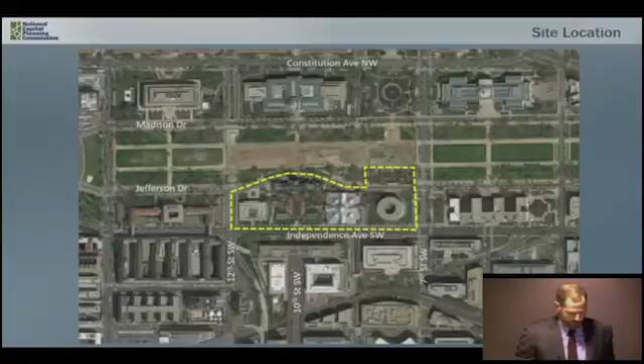So as a reminder, the project area is located on the south side of the National Mall between 7th Street and 12th Street, as well as Independence Avenue to the south and Jefferson Drive to the north. The site is a combination of important historic and cultural facilities which form the centerpiece of the Smithsonian Institution on approximately 17 acres. The campus also falls within the National Mall Historic District.

Today, the National Mall side of the campus is the source of the majority of visitors. As a result, the master plan recognizes the need to improve access and wayfinding from the north. However, the campus is also the terminus of 10th Street Southwest, which provides an important visual and physical connection from the southwest waterfront to the National Mall.

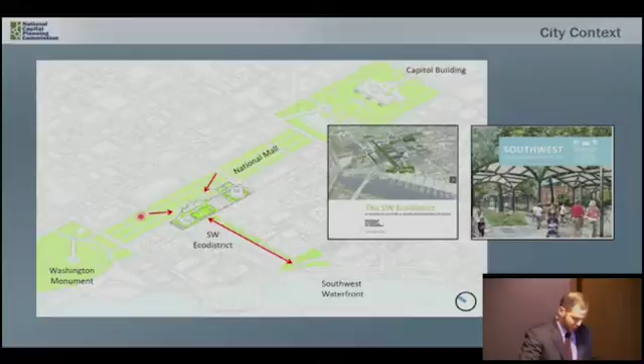The southwest quadrant has been undergoing significant growth, along with a number of planning efforts currently underway led by the District Office of Planning. In fact, the population and number of households are projected to double between now and 2045, and jobs are expected to increase from 80,000 today to nearly 110,000. 30 new developments are also underway, including entertainment, residences, and retail.

As such, the campus is located at a critical point where the east-west axis of the National Mall and this north-south corridor leading to the waterfront meet. Through the master planning process, it has the opportunity to better engage the neighborhoods to the south, attracting visitors, residents, and employees. I'll go into more detail about this context later in the presentation.

So here's the existing site plan with Independence Avenue to the south and Jefferson Drive and the National Mall to the north. Most of you have been to the campus, but just as a recap, I will walk quickly through the existing site and the various buildings and gardens to provide some context.

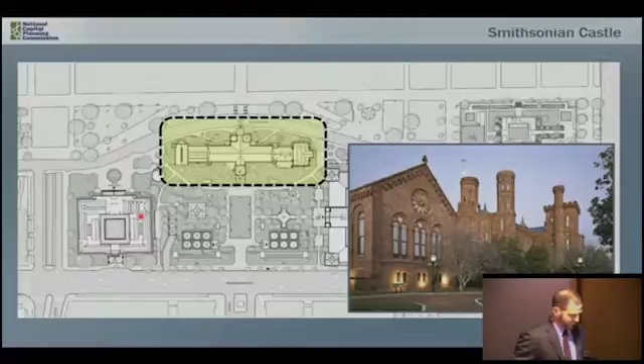First is the Smithsonian Castle, which is the centerpiece of the campus and also an icon on the National Mall. On the west side of the campus, we have the Freer Gallery, which houses one of the premier collections of Asian art.

Towards the center of the campus is the Arts and Industries Building, which was the first United States National Museum. On the east side of the campus is the Hirshhorn Museum and Sculpture Garden.

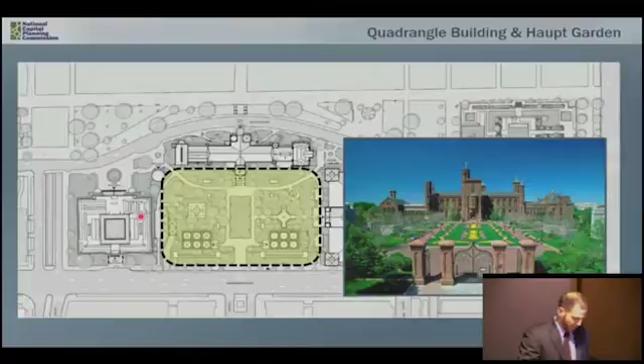At the center of the campus is the Quadrangle and Haupt Garden, which opened in 1987. This is a 3-story underground complex of museum, auditorium, and office space. The Haupt Garden occupies the roof, which is approximately 4 acres in size.

The Sackler Gallery and the National Museum of African Art are entered through 2 pavilions located on top of the quadrangle. These have stairs and elevators that lead down to the museum and other spaces.

Finally, we have several other structures and gardens, including the Ripley Center Pavilion and the Kathrine Dulin Folger Rose Garden, as well as the Ripley Garden, which is located between the Hirshhorn and the Arts and Industries Building.

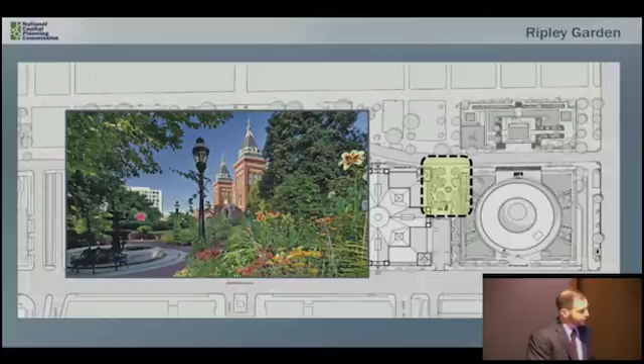In terms of process, a draft Environmental Impact Statement, or EIS, has been prepared to evaluate the potential impacts resulting from implementing the master plan. The draft is currently available for public comment, and here NCPC is the lead federal agency for NEPA compliance.

In this case, the Smithsonian works with NCPC where individual projects under the master plan will be submitted to the Commission for approval. In addition, the Smithsonian has also initiated the Section 106 process and has held several consulting parties meetings to discuss the number of historic resources within the campus.

The master plan, as I mentioned, is intended to guide development of the campus for the next 20 to 30 years. As with other master plans reviewed by the Commission, the plan will identify projects to be implemented over time as funding becomes available. Individual projects, again, will require review by you as the Commission.

While the master plan will include conceptual renderings and graphics of proposed improvements, the specific designs will be developed at the individual project stage. As such, the phasing of these projects may impact implementation. Therefore, staff recommends the Commission request the Smithsonian prepare a phasing plan which would be included in the draft master plan submission.

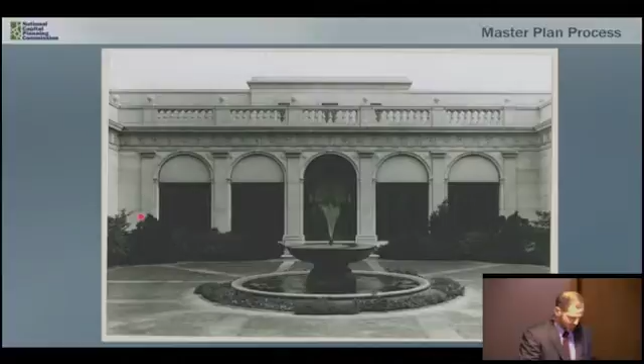To address individual project implementation over time, as well as potential impacts to historic resources, the Smithsonian stakeholders and consulting parties will be developing a programmatic agreement, or a PA, to comply with Section 106 of the National Historic Preservation Act. PAs are utilized when the potential effects of undertakings are not yet known, and it will set forth a process for further avoiding, minimizing, or mitigating effects through project design and implementation. As such, the PA will be a critical roadmap for future actions.

These goals are generally consistent with many of the policies identified in the comprehensive plan, and as such, staff recommends the Commission support the goals of the master plan, which address the Smithsonian's need to meet its long-term space requirements and address physical and operational deficiencies that impact visitor use and experience.

So quickly, I'm going to highlight some of these goals, which include restoring museums such as the Castle and the Hirshhorn, improving connectivity for visitors both from the National Mall as well as neighborhoods to the south, recognizing the existing flow of visitors from the National Mall, but also the growth and change occurring to the south, and the potential for an improved entrance from the south.

Improving visibility for the various museums and services housed in the campus, in particular the Sackler Gallery and the National Museum of African Art, are among the least known due to their below-grade location and limited visibility. Greater visibility of the castle from the south is also an opportunity to emphasize this approach as a new gateway.

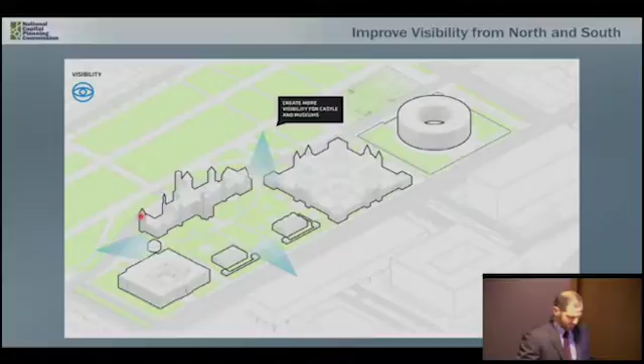The master plan also looks at consolidating loading areas and maintaining a high-quality landscape.

So what I'm going to do is give you a high-level overview of the alternatives, first by describing Alternative D and ending with Alternative F. Then I'll provide an overview of the elements common to all alternatives, and then highlight some of the more significant differences.

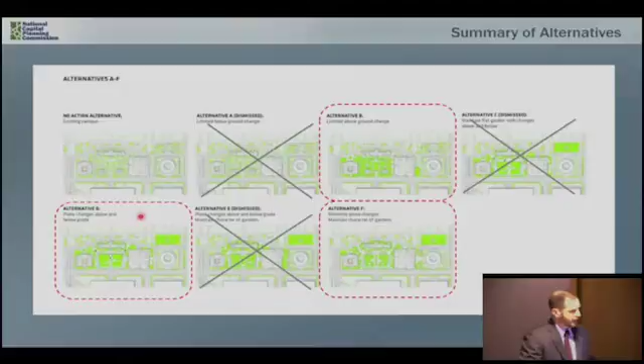So again, at a high level, Alternative D reflects the Smithsonian's first concept of the master plan. It included some of the most dramatic changes to the campus, including a new park-like setting, a large dip in front of the castle, and a significant amount of excavation.

Alternative B was explored as a way to minimize changes. The basic setting of the campus would not be significantly altered. Potential improvements to the campus functions and service would also be minimal.

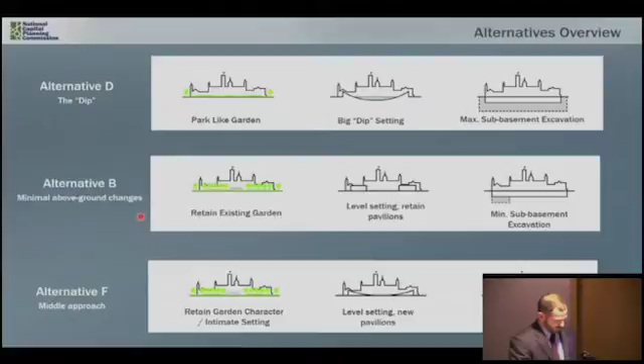Alternative F was last developed in response to comments received, and also as a result of Smithsonian's own evaluation of the master plan.

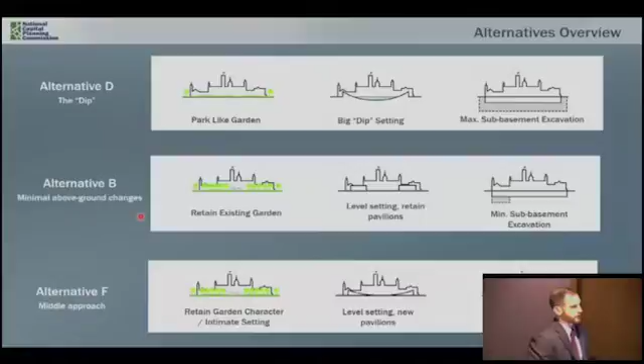So looking at Alternative D, again, it includes the most significant changes to the campus, including a large dip which goes below grade approaching from the south, the moving of the existing quadrangle pavilions and construction of new pavilions, and also significant changes to the Hirshhorn, including removing some of the site walls and changes to the sculpture garden. Here's one of the early renderings of the alternative looking from the southeast.

Again, this is perhaps the most radical departure from the existing conditions.

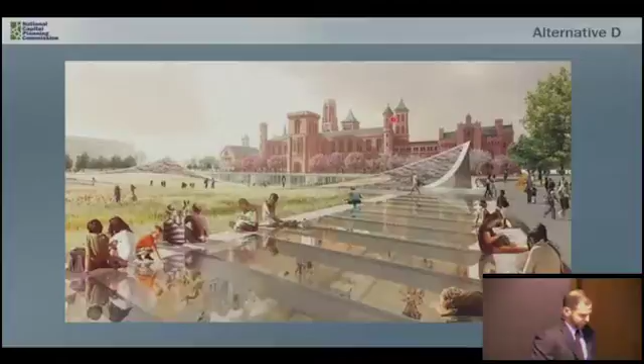Alternative B was explored as a more minimal approach. This alternative includes more limited changes above grade. For example, the pavilions would remain in place, and the flat setting of the castle would as well. Under this alternative, changes above ground would be minimal, but so would campus improvements, particularly to some of the below-grade museums and other spaces. Also, views to the campus and visibility to the museums would not be greatly improved.

After reviewing these earlier alternatives, as well as input from stakeholders, the Smithsonian created Alternative F as another approach, minimizing some of the changes which had raised concern, but still trying to maximize improvements to the campus function and service.

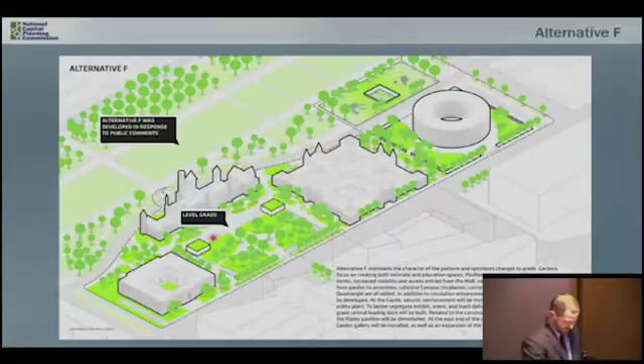So in this alternative, the flat approach to the castle is retained along with the parterre on the south side of the castle, while the pavilions are moved and the character of the garden is intended to be retained. Changes to the site walls of the Hirshhorn are also more limited. And here's an early conceptual view of this alternative.

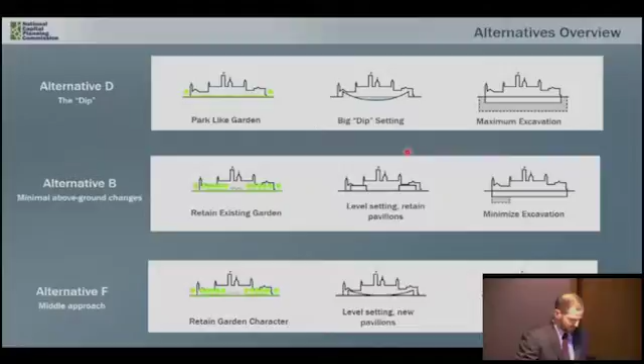Throughout the process, Alternative D in particular generated a significant number of comments and concerns, and while Alternative B was helpful in exploring how to minimize changes, it did not appear to best address some of the master plan goals, such as improving visibility and functionality for museums and services.

As such, Smithsonian developed Alternative F to address these major comments by retaining character of the gardens, as well as the flat setting and approach of the castle.

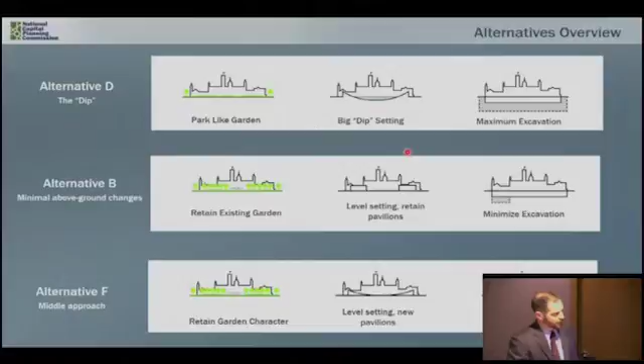Staff further recommends the Commission find that Alternative B and F also minimize the amount of sub-basement excavation, which was another public comment, by accommodating the program elsewhere in the campus. As a result of these changes, Smithsonian feels that Alternative F best meets their needs while addressing comments raised through the process.

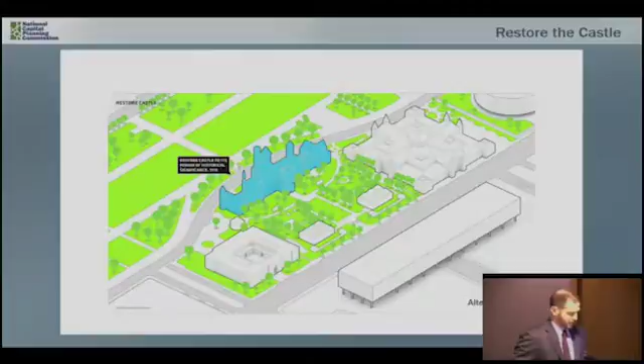With that high-level overview, I'm going to describe some of the major project components that are generally consistent across all the alternatives. They include, first, the castle being restored to its period of significance.

Over time, many of the large spaces within the castle were infilled with new floors and rooms. The Smithsonian proposes to remove many of the non-historic partitions to return the castle spaces to their original configuration where possible. Much of the existing office space, restrooms, and gift shops would need to be relocated as you're opening up much of the space to allow the Great Hall to be restored. The upper Great Hall, which has also been subdivided, would also be restored.

In addition, the Smithsonian has studied the castle to identify potential seismic risks and has determined that seismic protection would be appropriate to help protect the structure and the symbolic center of the institution. As a result, the master plan calls for providing seismic protection to the castle. The specific measures and implementation strategies would be developed at the project level, which would also require additional studies and engineering. The outcome of these additional studies would not affect the level of detail provided at the master plan.

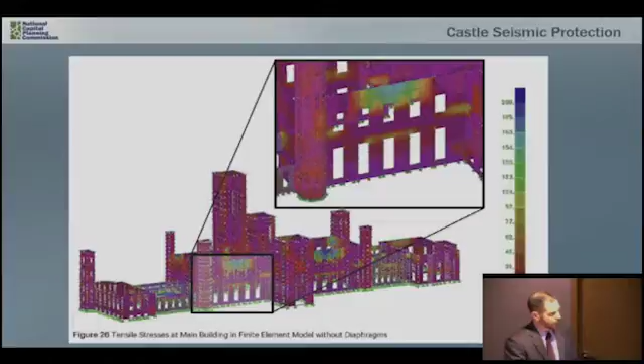The master plan also proposes a new below-grade visitor center. This would be generally located between the castle basement and the quadrangle building, which is again below grade here. It will connect to the restored castle, which will be accessible to the public. The visitor center would help accommodate some of the services that must be relocated due to the restoration of the castle, including the restrooms, cafe, and gift shop. Access to the visitor center would be provided through stairs, ramps, or pavilions, and additional daylighting could be provided to the underground spaces.

The Smithsonian believes that locating the center adjacent to the castle is important because its iconic image is well known to visitors who would seek services in that location. Further, the proposed location between the castle and the quadrangle would allow for below-grade connectivity between the various museums and services.

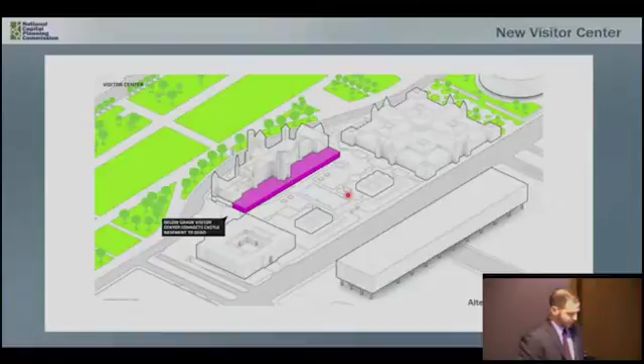Currently, the campus is served by several loading areas. Each of these is accessed from Independence Avenue Southwest. The quadrangle loading area here is located below grade, just east of the Freer Gallery. There's an entrance ramp that accesses it there. Another loading area is located in a surface parking lot next to the Arts and Industries building. And then finally, the Hirshhorn Museum has a ramp near 7th Street.

The Smithsonian seeks to consolidate loading where possible to meet their current facility needs, future facility needs, and to eliminate ramps in these parking areas that break up the campus visually. These areas could also become additional garden spaces in the future.

A new underground loading area would be accessed from the ramp west of the Freer Gallery. This loading area would be located at a sub-basement level, partially located beneath the west end of the castle. The Smithsonian has noted that the connection to the Hirshhorn Museum to this new loading facility would be challenging due to the 9th Street Tunnel, which is located here.

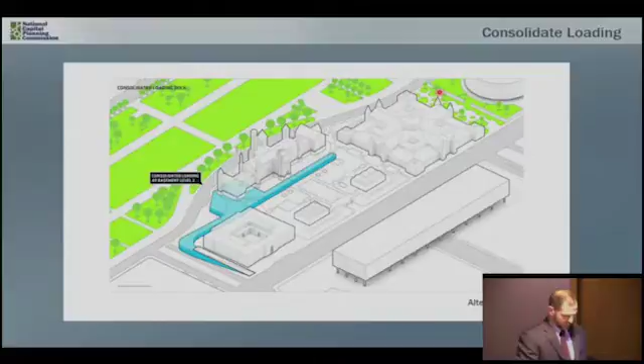A permit from the district's Public Space Committee would be necessary to accommodate the new curb cut, and the Smithsonian has applied for that permit, with discussion occurring in early 2018. Additional coordination would be necessary with the District Department of Transportation to address traffic and intersection impacts related to any new loading configurations. Loading generally occurs after hours and is planned in advance.

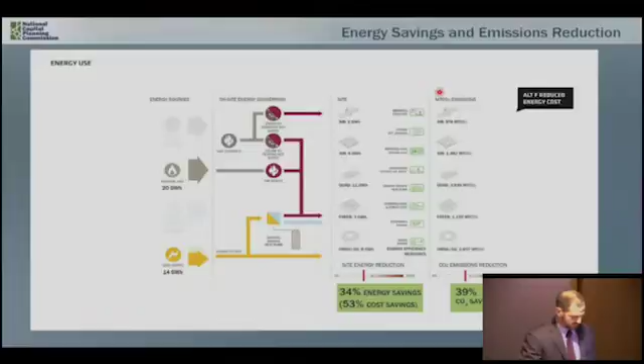The master plan also proposes the creation of a new underground central utility plant to serve the campus. This new facility will be modern and more energy efficient, allowing the Smithsonian to better control climate systems and services for visitors, staff, and critical museum collections. Underground utilities across the campus would also be upgraded.

Here you can see some analysis performed by the Smithsonian, which expects substantial energy and cost savings in addition to improved ability to control campus systems. The Smithsonian has also indicated that one of the goals of the master plan is to increase east-west connectivity across the campus and to help increase general accessibility for those of all mobility levels.

For example, currently the Freer Gallery is the only museum that does not have an entrance facing the Haupt Garden and the quadrangle. In addition, the wheelchair accessible entrance of the Freer is located off Independence Avenue, and those who use this entrance must ring a bell to gain entry.

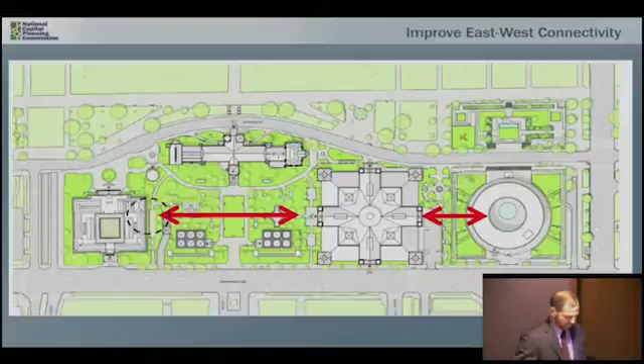The master plan proposes to add another accessible entrance on the east facade facing the Haupt Garden. With the removal of the quadrangle loading area, this new entrance would allow direct access between the Freer Gallery and the garden. In addition, it will allow for the establishment of that west to east connection.

On the northwest side of the campus, the Ripley Center is entered from a pavilion located between the Castle and the Freer Gallery. The master plan proposes to remove the pavilion to permit improved views and pedestrian access from Jefferson Drive and the National Mall into the center of the campus.

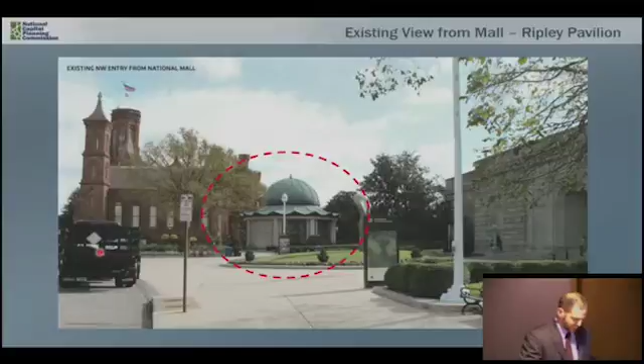This view will help assist visitors in recognizing the presence of the other museums and gardens located south of the castle. Access to the center's facilities would be provided through the quadrangle and the visitor center.

The Smithsonian has indicated that the Arts and Industries building will continue as a flexible space for temporary exhibitions and public events. At this time, the building has been identified as a potential location for other museum uses, but no final determination has been made.

Because the building and its historic character make it a prime candidate for museum use over the next 20 to 30 years, staff suggests the Commission request the master plan indicate the conversion of the Arts and Industries building into a museum use is reasonably foreseeable as a long-term project, regardless of the final occupant. And then further, the master plan should describe any implications for such a use.

The master plan also calls for the restoration of the Hirshhorn building, and the exact details again would be identified as the project is developed. I'll describe potential changes to the sculpture garden a little bit later in the presentation.

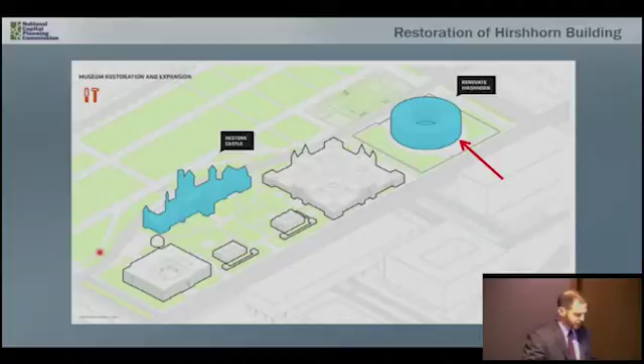And then finally, the master plan also calls for updates and improvements to the perimeter security. Again, details will be developed with the design of the project, and Jefferson Drive will remain in its current configuration.

In general, staff finds that these projects will support the Smithsonian Institution's long-term needs. They will also help enhance the visitor experience and help modernize the campus. As such, staff recommends the Commission support these components as they help improve visitor service, increase access across the campus, and modernize facilities, while recognizing that program and functionality must be balanced with historic preservation, planning, and urban design goals.

And as I noted, the specific designs for each project will be developed as funding becomes available, and these details will be critically important in successfully implementing each project while minimizing any negative impacts.

So while the alternatives share a number of similar elements, there are several more significant differences that primarily deal with the amount of above-ground changes. First, I'm going to discuss the quadrangle building and pavilions.

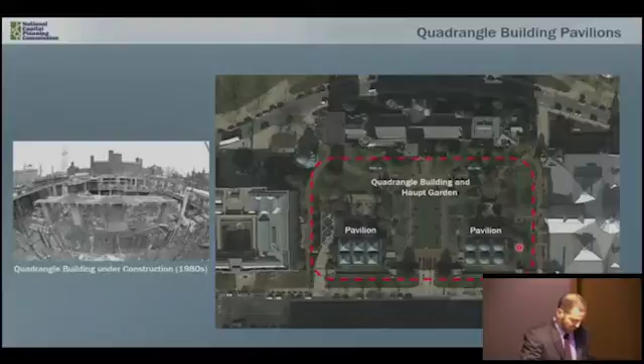Today, the Sackler Gallery and the National African Art Museum are accessed through these 2 pavilions, which are an above-grade extension of the quadrangle building. They include stairs and elevators leading down to the museum spaces below grade. The Haupt Garden forms the roof of the building.

And while the quadrangle and pavilions are contributing to the National Mall Historic District, the quadrangle building itself was found not eligible for listing in the National Register.

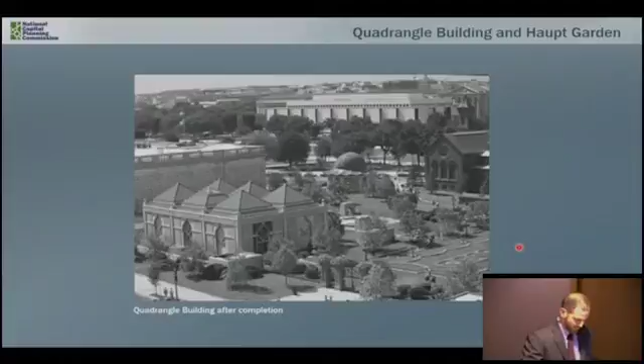The Smithsonian seeks to make the Castle, Sackler, and National African Art entrances more visible to the public, particularly from the National Mall, as well as to increase functionality of below grade museum spaces and to improve visibility from the south. Visitor studies show that these below grade museums are known less than their larger counterparts on the mall, and the context of the pavilions has changed over time, even from when they were first completed.

And further, the context continues to change. The Southwest Eco District Plan, along with the Maryland Avenue Small Area Plan, considered how the area south of the Mall campus could be redeveloped, with the existing federal facilities redeveloped as a sustainable mixed-use community.

The Commission also recently approved upgrades to Banneker Park to help facilitate the pedestrian and bicycle connection, which leads down 10th Street to the waterfront. At the same time, there are a number of other projects, such as the International Spy Museum, as well as the wharf development, which are either under construction or nearing completion.

Other cultural uses, like the new Anthem Theater and Arena Stage, have a natural nexus with the cultural uses of the Smithsonian. As such, staff recommends the Commission find that the master plan must consider the context of a changing city, particularly the Southwest Eco District and waterfront, which will change the character of Independence Avenue and the southern approach to the campus. This changing context suggests the campus can be an important connection between the Mall and the city in a way that is currently not.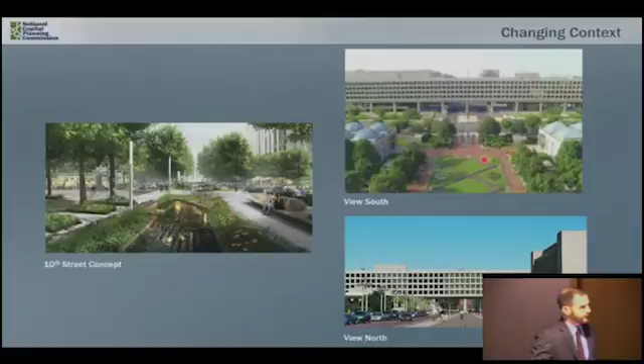In addition, the Forrestal building may one day be reconfigured to allow open views to the north and south. These new views, as well as wider views of the castle, could enhance the connection. Also, placing the visitor center on the south will strengthen this relationship. And finally, I'll note that the new District of Columbia zoning regulations would allow future private development on these sites to be taller and closer to Independence Avenue, further changing the context.

So with that, I'd like to talk a little bit about the functionality of the quadrangle. These changes have implications for both views and connectivity, but importantly, they also impact the functionality of the below-grade quadrangle spaces. On the left, you can see Alternative B, which keeps the pavilions, highlighted here, in their current location.

The Smithsonian believes that retaining this location would not greatly improve the function of the quadrangle interior, as the public spaces and circulation cores could not be connected to the visitor center or the castle. This lack of connectivity does not allow for an efficient floor plan and requires the public to pass through back-of-house functions, which are located here.

By contrast, in Alternative D and F, new pavilions are built closer to the castle and smaller in size, and shift the vertical circulation core to the north, connecting them with the public spaces of the visitor center, including the new entrances to the Sackler Gallery and African Art Museum. The new pavilions would then allow the remainder of the quadrangle space to be rationalized in a more functional way. All public areas would then be directly connected and back-of-house functions would be separated. This layout allows for the consolidation of screening as well at the new visitor center.

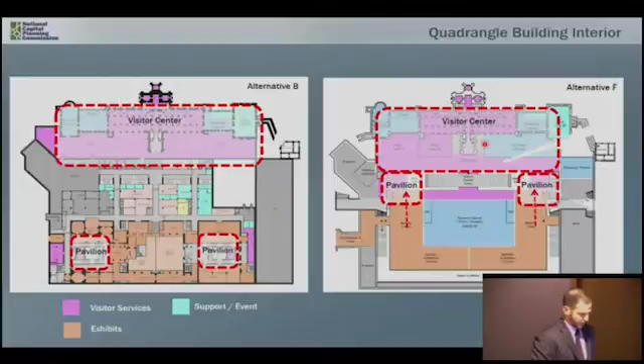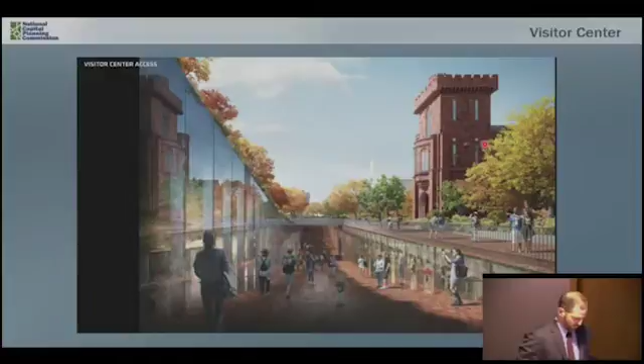So the visitor center and pavilions, as shown conceptually here, would provide a centralized location to enter the museums and enhance visitor awareness of their presence. The Smithsonian also believes consolidating visitor services and the multiple entrances will be more intuitive and more functional for the public.

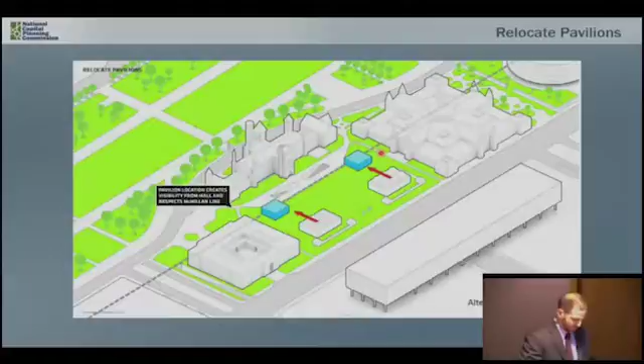The location of the pavilions, in conjunction with removal of the Ripley Pavilion, would also allow views from the National Mall into the new entrances. Again, the Smithsonian has indicated that allowing visitors to see the presence of the National African Art Museum and Sackler Gallery entrances is important.

New pavilion locations would provide wayfinding as viewed from the National Mall, and therefore staff recommends the Commission find that the new pavilion locations would create greater visibility for the Sackler Gallery and National African Art Museum.

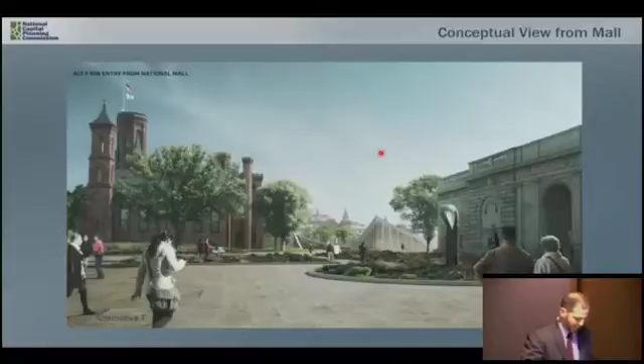The pavilion locations also have implications for views of the castle and visibility and connectivity to the neighborhoods from the south. Alternative B retains the current locations, as seen in this recent image from 10th Street and Independence Avenue. As viewed from the south, the pavilions hide the west and east wings of the castle. Here you can see the same view rendered as a line drawing.

In Alternatives D and F, the new pavilions are located closer to the castle. They are reduced in size by about 30%, and as a result, more complete views of the castle are possible from the south. Staff recommends the Commission find that smaller, relocated pavilions could improve views of the castle and the National Mall from the south, and guide visitors from the southwest quadrant of the city, including the Southwest Eco District, the Wharf, and Waterfront, which are connected along 10th Street Southwest and are undergoing tremendous growth.

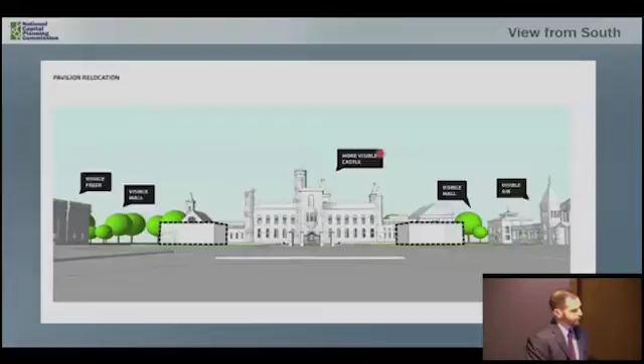The Smithsonian has also explored how to further express the form of new pavilions, but as I've noted, specific designs of all the project elements would be developed later in the future.

Given the impacts on both views and functions, staff recommends the Commission find that the current location of the pavilions affects the configuration and functionality of the below-grade quadrangle interior spaces, as well as views to the castle from Independence Avenue and 10th Street to the south.

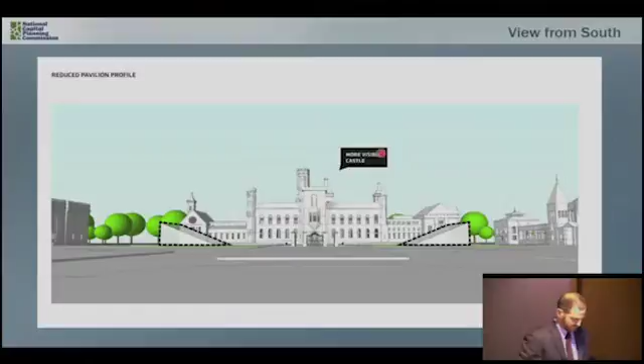Another difference among the alternatives is the treatment of the Haupt Garden, which is the roof of the quadrangle building. Over 30 years old, it is nearing the end of its life, and when it is replaced, the existing garden will be removed.

Today, the garden provides a view to and setting for the castle as seen from the south. Through the engagement process, many members of the public have expressed their strong support for the garden, and staff recommends the Commission find the garden provides a view to and setting for the castle as seen from the south. Further, the intimate character and scale of the existing garden is a beloved component of the South Mall campus, and is also an important counterpoint to the scale and openness of the National Mall.

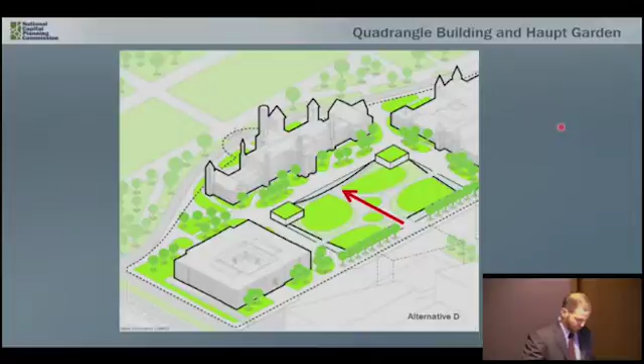Alternative B essentially retains the existing configuration and character of the gardens, while Alternative D, shown here, with its large sloped entry, would result in a more open, park-like setting. Alternative F would retain some characteristics of the current garden, including the parterre, but would not recreate the exact layout. Staff finds that Alternative D, again shown here, most dramatically changes the setting of the castle, and therefore recommends the Commission not support the large sloped entry in this alternative, as it would greatly change the character of the garden and the setting of the castle.

Staff finds that it is possible to create a balanced approach that generally meets the Smithsonian's goals while maintaining the intimate character of the existing gardens, through site configuration, appropriate landscaping, as well as maintaining the Renwick gates, which help define and enclose the space along Independence Avenue.

While the Smithsonian will not develop the specific design for many years, staff suggests the Commission recommend the future design of the garden balance the desire to maintain an intimate character and scale with the need to improve the quadrangle building and the desire for greater access and visibility across the campus.

While replacing the garden in kind would retain the exact configuration, it may also preclude some of the improvements that the Smithsonian is trying to achieve, including daylighting the quadrangle building, shown here, and improving visibility for the Sackler and National African Art entrances.

Staff recommends the Commission find that while the master plan will not include a specific design for the gardens, changes in circulation, vertical access, and daylighting of the quadrangle building will influence the future garden design.

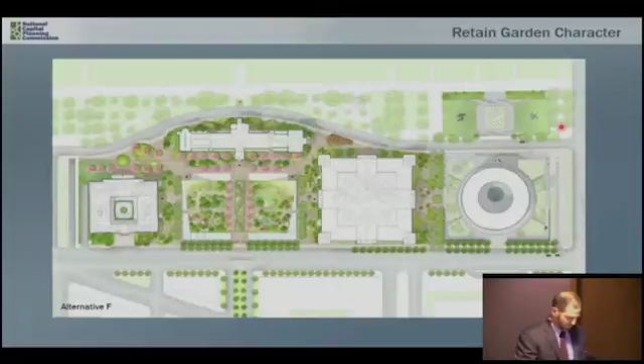At this time, the Smithsonian believes Alternative F best balances preserving the setting of the castle and the character of the gardens, while improving the functionality of the quadrangle building and increasing visibility for the Sackler Gallery and National African Art Museums. Staff notes that the Smithsonian has also publicly committed to maintaining the intimate character and high-quality landscape of the garden as the design is developed in the future.

Finally, I'm going to conclude with a discussion of the changes proposed to the Hirshhorn site and the sculpture garden. The master plan proposes to rehabilitate the Hirshhorn Museum building, and in addition, it seeks to improve connectivity between the museum and the rest of the campus.

Currently, a perimeter wall surrounds much of the site, with openings to the north and south respectively, and a small accessible entrance located at the northwest corner. The master plan proposes to add an opening in the western site wall to allow for direct pedestrian access from the east doors of the Arts and Industries Building to the Hirshhorn Museum site. The elimination of the Arts and Industries Building loading area, mentioned earlier, would also facilitate this connection and allow the gardens to expand.

Alternative D proposed the most substantial changes to the site walls, while alternatives B and F limit the opening to that necessary only for pedestrian connection. Because the sense of enclosure is integral to the character of the site, staff recommends the Commission find that a modest opening in the western site wall would facilitate pedestrian connections to the Arts and Industries building, while a larger alteration of the wall will change the character of the Hirshhorn Museum site.

Here you can see the existing view looking towards the west, and here is a view with a limited pedestrian connection between the Hirshhorn and Arts and Industries.

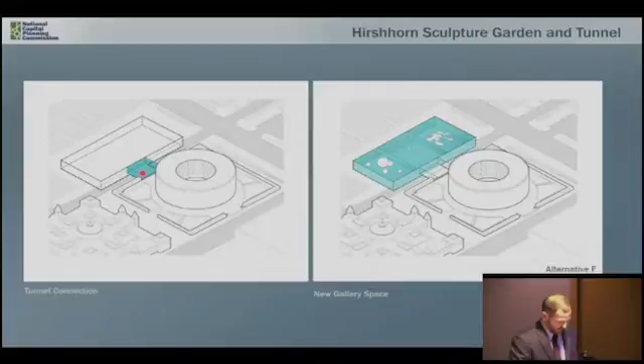Alternatives D and F propose more substantial changes to the Sculpture Garden, including a new below-grade gallery space and widening the existing tunnel. Given the potential scope of these changes, staff recommends the Commission request the Smithsonian provide additional details, including sections that describe the proposed expansion of the tunnel and the addition of gallery space below the Sculpture Garden, as indicated in alternatives D and F, so that the Commission may better understand the potential impacts to the setting and views of the mall.

As I mentioned previously, the purpose of the concept review is for the Commission to provide comments on the various alternatives, as well as Smithsonian's preference at this point. Your comments, as well as those received through the draft environmental impact statement process comment period, will help inform and guide the selection of the NEPA preferred alternative and the preparation of the draft master plan. The draft master plan is expected to return to the Commission later this spring, at which time the Commission will select a preferred alternative.

In the interest of time, I'm not going to go through all the details of the Executive Director's recommendation. I will have it here for your review. Members of the Smithsonian are here, as well as their consultant team, to help answer any questions. Thank you.

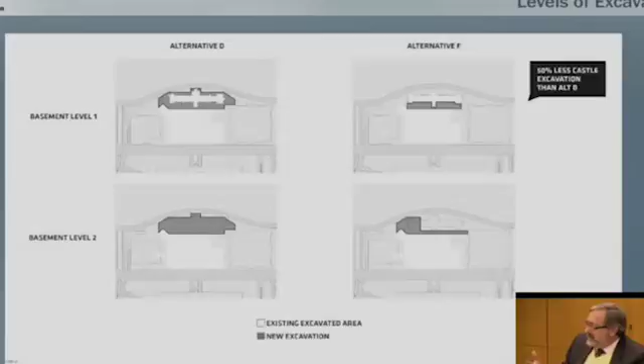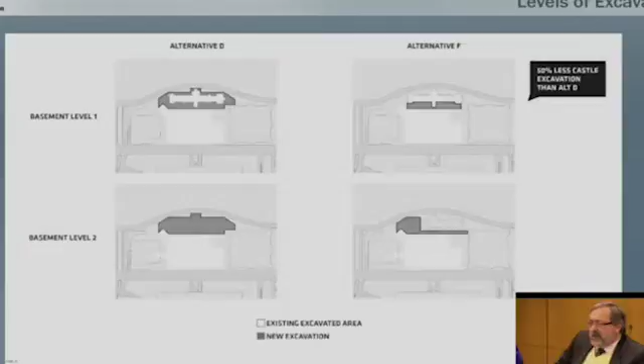And then my second question is, in the difference between, say, D and F, is that in D we have the loading also going further down, and in F we don't have that. So I didn't understand why we do or don't need that option.

The main difference in terms of the basement area of the castle between D and F is that in D, below the public basement level, which we already lowered, was a whole other level of mechanical and related non-public space. At one end, a loading dock came further under the castle into that sub-basement space. In alternative F, we have taken all of the mechanical out from under the castle.

We put it in a multi-story underground building between the AIB and the African Art Museum of the Quadrangle. That enabled us to reduce the excavation under the castle, and our engineers tell us it's a better location for the mechanical room. So many benefits. Thank you.

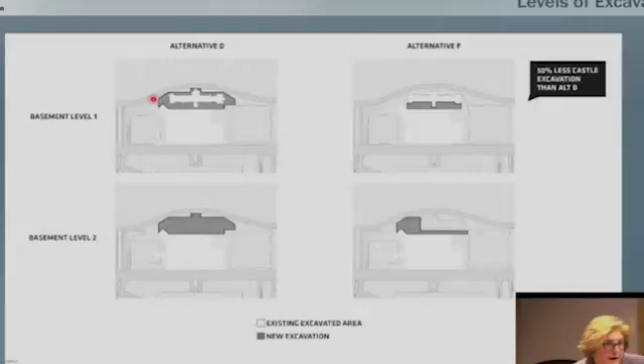I don't think it's possible to eliminate Dillon Ripley's presence and his history with the museum. But what's happening with him on the mall with the gardens? Is his presence still going to be acknowledged and recognized? Absolutely, I think the plans...

The Mary Livingston Ripley Garden, named after his wife, will continue and will be able to be expanded with the removal of the Arts and Industries parking lot and service area that now occurs at the south end of the garden. And of course, we call our education center the Ripley Education Center.

Those spaces, our stakeholders—the Smithsonian Associates who manage our education programs—have ambitions to almost double their current space in terms of classrooms, where they have adult education programs, special lectures, and so on. So that will continue, it will just be reconfigured in different places in our buildings.

Question? Can I only ask a question, or can I add my comments as well, or are we going... I was trying to tell you what I meant, okay. I was trying to be efficient.

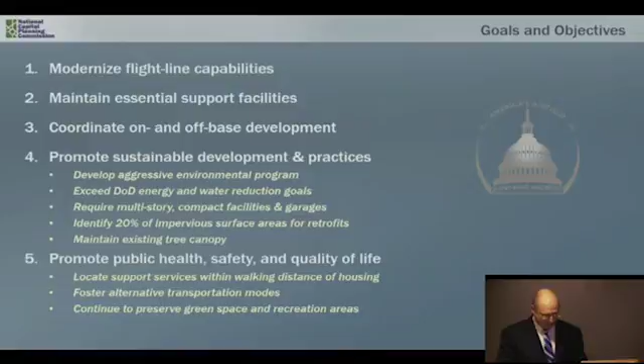Each of the goals is supported by a number of more specific objectives, several of which are designed to minimize the installation's impact to the natural environment and to develop the installation in a more efficient manner.

The 2016 Joint Base Andrews Master Plan, technically known as an Installation Development Plan, is a planning framework for the base over the next 20 to 30 years. The plan inventories existing infrastructure, assesses base assets, and compiles numerous recommendations on how to develop the installation to meet its future development goals.

With no assumed new population or mission growth on the installation at this time, the 2016 plan was developed as a recapitalization plan, identifying future short, medium, and long-term projects that will maintain installation operations through various improvement and recapitalization projects.

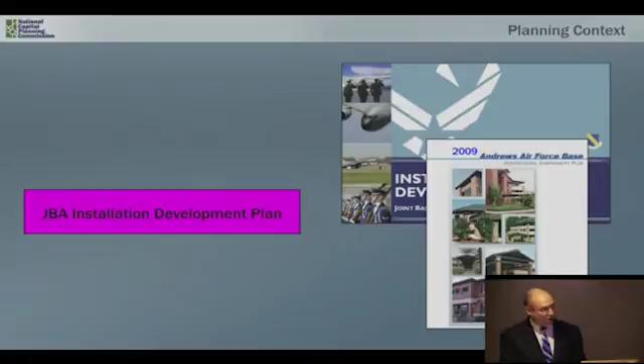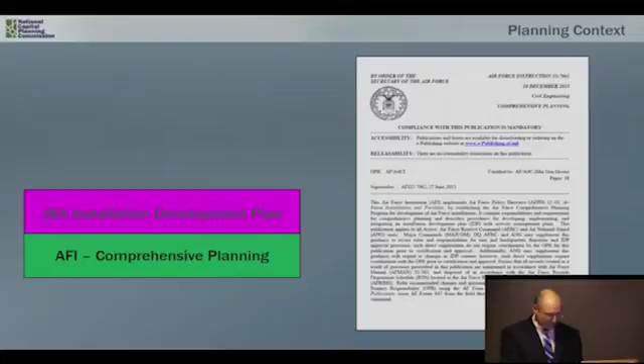The master plan is designed to guide future development in conjunction with the 2009 Architectural Compatibility Plan, which includes detailed information on roadway hierarchy, roadway cross-sections, street furniture, landscaping, lighting, and building design. The installation master plan is based on branch-wide Air Force planning policies, formally known as Air Force Instruction for Comprehensive Planning, which are intended to improve and integrate physical development with the investment planning process, legal requirements, and other DoD and Air Force policies.

The 2012 Department of Defense Unified Facilities Criteria for Installation Master Planning resource serves as the foundational, sustainability-oriented policy for all Department of Defense master plans within the continental United States. Their intent is to promote efficient use of military resources through compact, mixed-use, multimodal development.

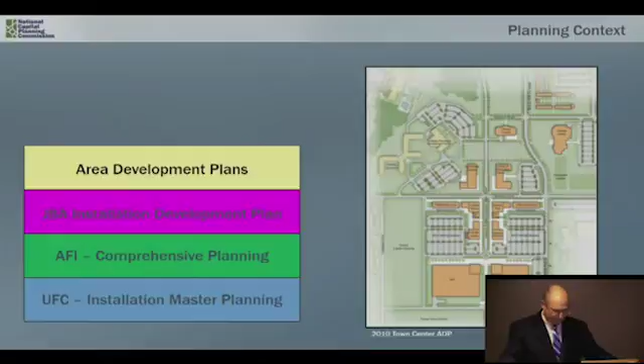Building on the Installation Development Plan are smaller-scale area development plans, which are intended to bridge the gap between the installation-wide plan and site-specific project plans through planning regulations specific to a particular area of focus on the base. ADPs are prescribed in both the UFC and Air Force instructions for planning. The Joint Base Andrews IDP identifies several future area development plans to regulate the more dynamic locations on the base, with information on roadways, pedestrian paths, parking, and landscaping. This slide shows an example of an area development plan developed for a new town center from a previous installation master plan.

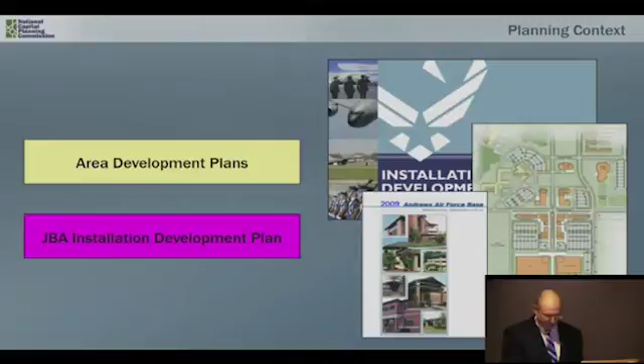Lastly, as projects are identified, developed, and funded, project plans guide site-specific design and construction. These plans are all integral to base planning since they translate broader level Department of Defense and Air Force policies into future physical desired systems on the installation for things like transportation, stormwater management, open space, and energy production. Future projects are then designed to fit within these installation-wide systems like pieces in a puzzle to build towards various planning and development goals.

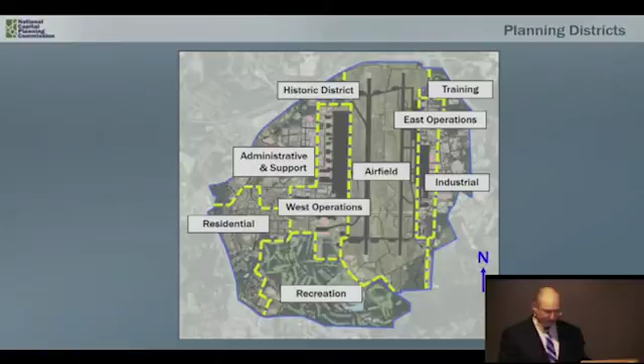Here's a graphic that shows the current installation layout. As you will note, there are 6 gates for access. And here you see the installation's 9 planning districts, each based on framework plan elements, relationships to the existing transportation network, and established land use patterns.

The most predominant of the districts, the airfield district, bifurcates the installation with 2 main north-south runways and a series of smaller taxiways that connect to each of the 2 operations districts, which host aircraft hangars, warehousing, a control tower, and other various support buildings.

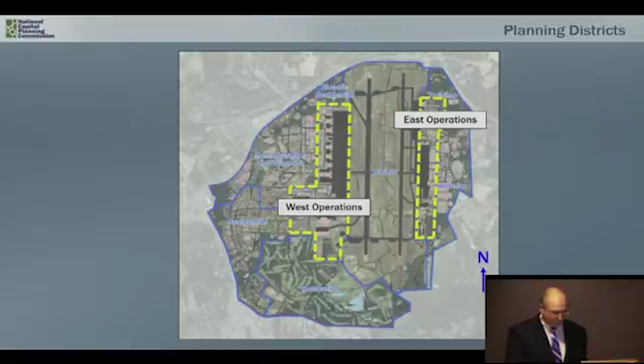The industrial district is situated in the very eastern side of the installation, encompassing uses like vehicle maintenance, repair services, warehousing, and National Guard support buildings.

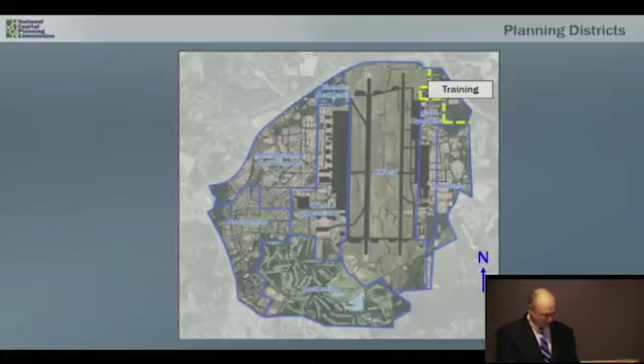A 130-acre forested area is reserved for various field training purposes in the far northeastern portion of the installation. And the installation's 1 historic district is situated in the northwest, with 3 historic buildings known as the Belle Chance Complex, along with surrounding fields, wetlands, and forested areas.

A relatively expansive recreation district resides in the southern part of the installation, encompassing 3 golf courses, several parks, a child daycare center, and a family counseling center.

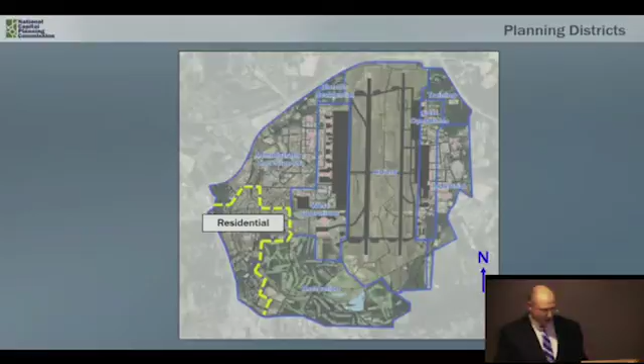The privatized residential district is located along the southwest side of the installation with approximately 900 military housing units and an elementary school. And the most diverse and dynamic of the planning districts is the administrative and support district in the northwest part of the installation, encompassing uses such as the main headquarters building, temporary housing, a large ambulatory care complex, a fitness center, and a conference center. This district contains approximately half of all potential future developable area on the installation as identified by the master plan.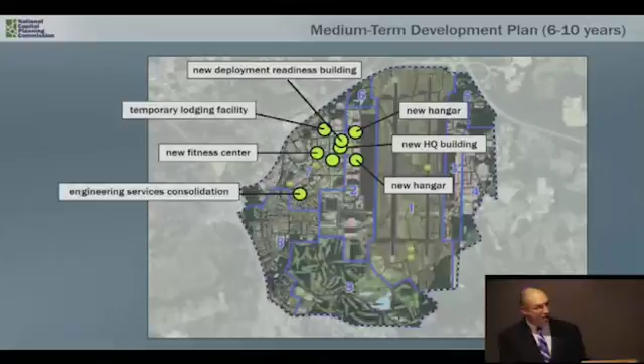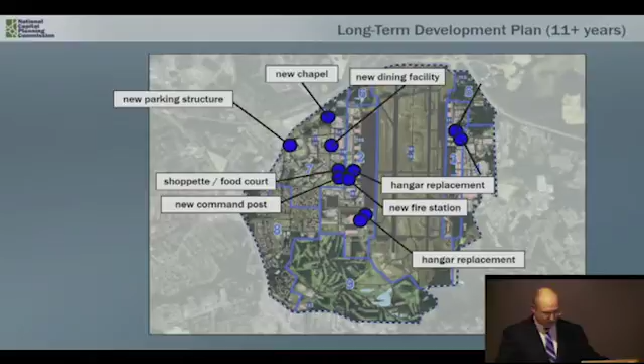These are the projects identified for the medium term, 6 to 10 years into the future. And again, here are the more significant recapitalization projects, which are largely concentrated in the main administrative and support district. Finally, here are the longer term projects, currently scheduled for 11 plus years into the future, and here again you will notice that some of these projects are concentrated in the installation's administrative and support district. Here we have a close-up view of the district with its 2 access gates, existing development, shown in pink, and future development sites, shaded in green.

Here's the site of the new Consolidated Communications Center. And here again are the more significant projects planned for the district in the future.

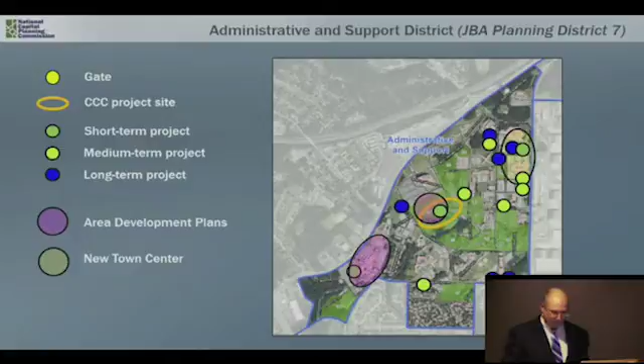The installation development plan mentions 3 potential areas where the Air Force would like to develop more detailed area development plans. One of these, shaded here in green, would be the site of a new town center development adjacent to the current commissary and base exchange buildings. This is a different location than the town center ADP from 2010 that was developed from a previous master plan, which I displayed in one of my earlier slides.

As you can see from this graphic, this district will be a recipient of a lot of planning activity in the future. So that leads us into our staff analysis, which was based on NCPC submission guidelines along with direction from DoD and Air Force planning policies.

Based on the Joint Base Andrews submission, we have determined that additional information is required to enable NCPC to review future projects both at the installation and sub-area levels. Although the 2016 IDP and 2009 Architectural Compatibility Plan adequately describe existing development, infrastructure, and goals and recommendations for the installation, the plans do not go far enough for our review purposes in laying out the installation's future physical, transportation, stormwater management, and landscape networks based on the recent goals and recommendations expressed through the 2016 Installation Development Plan.

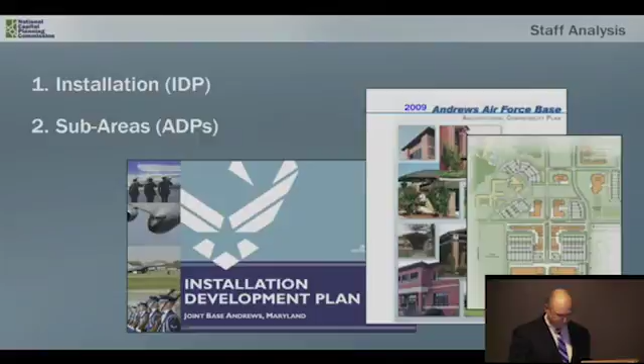Here is the higher level information that we are looking for in the next master plan submission. I do want to point out that the 2009 Architectural Compatibility Plan does have some of this information. However, the information should be updated to reflect the goals and recommendations from the 2016 plan.

Both the installation-wide and smaller area information on how the installation will develop in the future is necessary to help the Commission truly understand the larger planning context for each project and to demonstrate how each project will build toward attaining various Air Force and DoD efficiency goals.

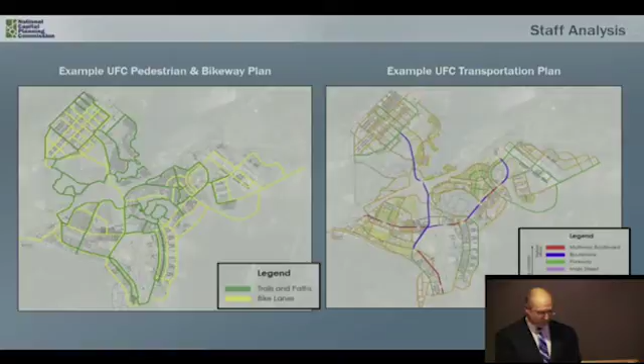Here are some examples of future planned installation-wide roadway, pedestrian, and bicycle networks from the 2012 UFC Planning Resource for reference. And here are some examples from a recent master plan that NCPC reviewed last year in January from Fort Belvoir, a multimodal circulation plan you can see on the left, and there's a watershed improvement plan displayed on the right. These plans are great examples of the type of systemic approach that we would like to see for all federal master plans to demonstrate how federal properties will develop in a more efficient, cost-effective, and sustainable way.

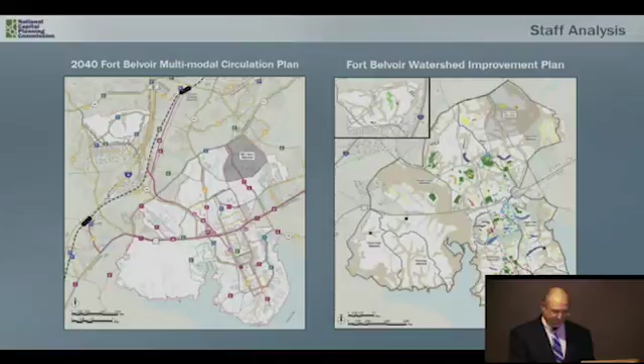So with that, here's the Executive Director's recommendation: to note that in accordance with DoD and Air Force planning policies, the Air Force has developed an installation development plan for Joint Base Andrews; to note that the plan is a framework plan that includes a vision, goals, and objectives in addition to a list of recommendations and desired capital projects; and also that Joint Base Andrews does not anticipate a population change in the future at this time.

To support the vision, goals, and objectives from the IDP to create a more sustainable, efficient operation at Joint Base Andrews. However, to find that additional information is necessary for NCPC's future review of individual site and building projects and their potential for on- and off-site impacts prior to future project submissions.

To request that the Air Force include the following information with its next IDP submission to provide the Commission with a broader context of future installation development. First, an installation-wide multimodal circulation plan with existing and planned networks and future improvements, an up-to-date transportation plan with things like parking utilization, planned travel demand management improvements, and goals and implementation schedules for reducing single-occupant vehicle travel. And lastly, installation-wide plans for future stormwater infrastructure, wetlands mitigation, and future renewable energy production locations.

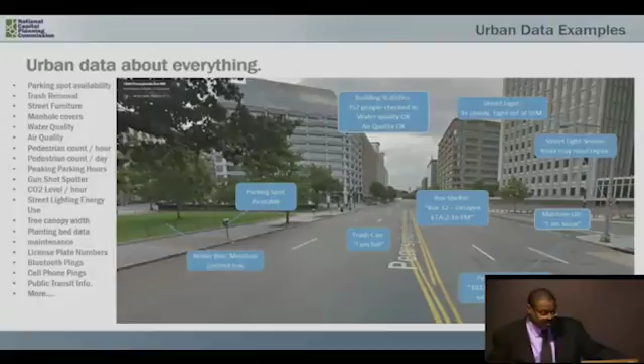There are several elements common in the smart city development process, like collaborative problem solving, virtual design and planning, smart object modeling, data analytics, digital sensors, and cloud computing.

NCPC has worked on several projects over the last few years that led to our involvement with the Global Cities Team Challenge. These 3 projects used some combination of the elements I just mentioned to reach their goals of crowdsourcing an urban design solution, creating a district-wide energy model, or developing a virtual viewshed augmented reality tool.

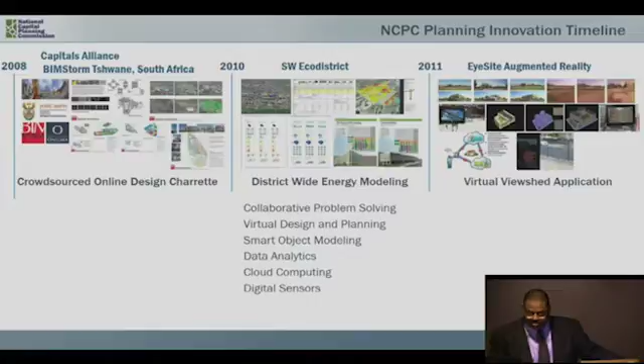The project is located along 17th Street, just adjacent to the White House, on the west end of Pennsylvania Avenue, from 17th Street in the east to 20th Street in the west, I Street to the north, and G Street to the south.

The Pennsylvania Avenue project is one of 100 or more projects generated by the Global City Team Challenge. The GCTC was developed by an engineer and presidential innovation fellow at NIST, Sokwoo Rhee, and the GCTC itself grew out of the Smart America Challenge.

This was an initiative that sought to improve the overall economic climate in the country through innovation, by creating innovation teams that connected private organizations with government and institutions to develop products, tools, and jobs to kickstart the economy.

Smart America 2 was the Global City Teams Challenge, with similar goals, but the approach was to set universal Internet of Things, or IoT, standards for smart cities and advance the incubation and deployment of smart city technology.

Creating all these smart city projects requires funding, and so a funding stream was created by the National Science Foundation through grants and US Ignite. US Ignite is a nonprofit organization that helps accelerate next generation applications and services for smart communities. They help facilitate public-private partnerships and secure grants for pilot projects like our PA 2040 project.

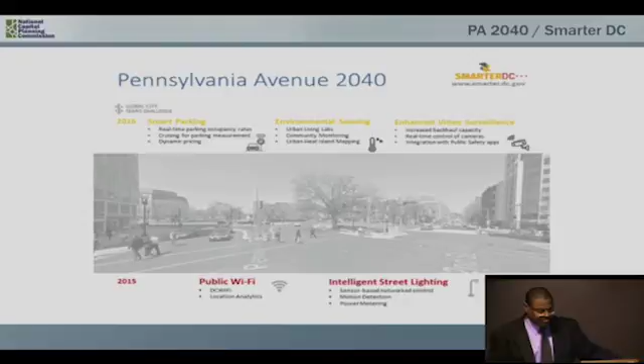So the project was carried out in phases. The first phase was basically creating, or at least trying to adopt, public Wi-Fi.

That was accomplished by using smart lighting. Smart lighting places Wi-Fi receivers in the streetlights along Pennsylvania Avenue, creating a mesh network. So as a user walks along the avenue, he stays continuously connected to the internet, being passed from sensor to sensor as he moves along.

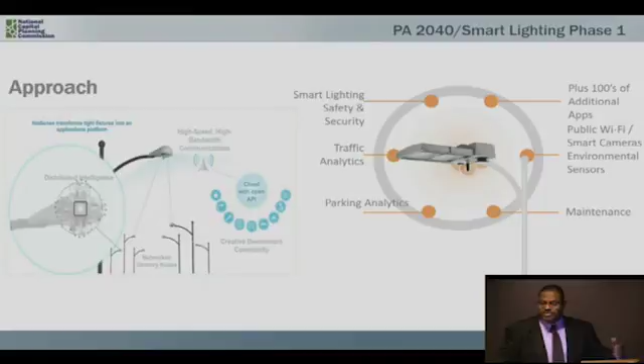The mesh network was then backhauled, or connected to the internet, through a fiber cable, and that allowed us to create hundreds of applications from one sensor. So we had sensors that create security analytics, traffic analytics, parking, maintenance, and hundreds of other types of applications from one server, from one sensor.

So the second phase of the project was basically implementation. The majority of the year was spent pulling permits, trenching for the fiber network, and adding sensors for the streetlights. And as I mentioned, the project is located on the west end of Pennsylvania Avenue.

This is a view of the existing conditions looking west along Pennsylvania Avenue. Our mesh network and sensors could easily enhance any new streetscape design that was developed for this area, and allow for better integration of smart technology with good urban design and planning principles.

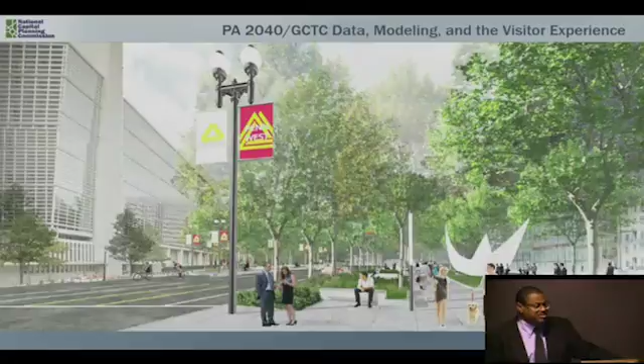This is the proposed streetscape design for the west end of Pennsylvania Avenue. It's cheated a little bit over towards the sidewalk, but it's still looking west. And this is the same view with the overlay of our sensors within the design scheme.

So from one source, there are many applications that can be created: parking, climate, air, water, wayfinding, trash removal, and manhole cover alarms, and more. And we're not just talking about random technology being applied to the area. The technology that's there is tied directly to the design, so it enhances what's going on with the actual streetscape design, and gives another layer of experience to the user.

So when was the project launched? PA 2040 was kicked off in October of 2016.

These are images from that launch event. The mayor, Ms. Bowser, and the CEO of Cisco Systems, Chuck Robbins, all attended the event and gave a little presentation. At the same time, the district was named the first Lighthouse City, a sign of the city's commitment to smart cities technology and Cisco Systems' commitment to supporting smart cities projects within the district.

So just to give you an idea of what our partners are continuing to work on, and give you a sense of what's going on with PA 2040, some of our teammates from GW are still adding new arrays of environmental and other types of sensors to the project.

These images show an Intel sensor kit, provided by the Global Cities Teams Challenge, that the students from GW have used to teach Internet of Things introductions to high school students here in the district. We're passing around one of those sensor kits. The idea is that this is something they pass out at the beginning of the Global Cities Teams Challenge, so when architects, planners, and other non-engineers come in, they can get a sense of how to program some of these tools.

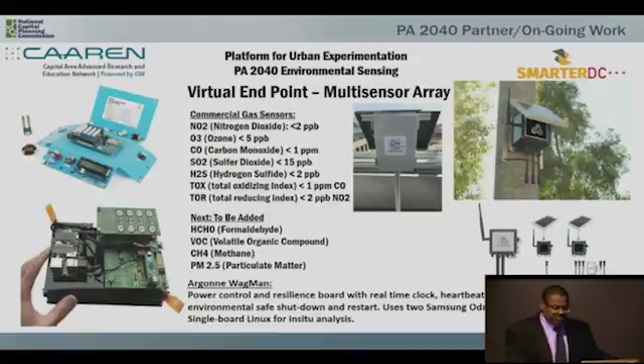So NCPC's ongoing smart cities work, we are continuing to try to create pilot projects, but a big part of making these projects happen is funding.

We've endorsed the Smarter DC team by submitting project team support documents for grant proposals with the district government. We've advanced smart city proposals through GSA's Emerging Technology Community of Practice. We've developed a white paper on integrating emerging technology with monuments and memorials, and contributed to smart city solutions and public hackathons and co-design workshops that relate to visitor experience and community planning.

Next steps, we're still trying to integrate Smart Cities technology policy into the comprehensive plan federal elements. Currently, we're looking at the transportation element and the urban design element. We're going to attend the Smart and Secure Cities and Communities Challenge kickoff next month, the next version of the Global Cities Teams Challenge. This year it's being coordinated with the Department of Homeland Security, looking at more security solutions. We'll continue working with the Federal Emerging Technologies Community of Practice on artificial intelligence, virtual and augmented realities to build smart city solutions meeting the current administration's goals. We're also exploring using emerging technology to improve the visitor experience in the city.

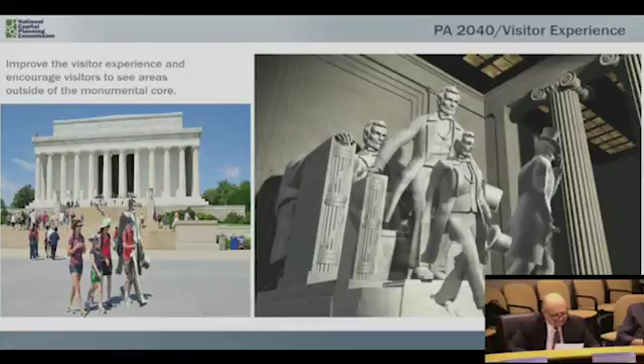Where are the pink parrots? Kind of like the pink parrot thing, right? That's all I want. No physical robots here. Everything's virtual. Thank you very much, Mr. Walton.

Okay, do we have questions for Mr. Walton? Actually, Commissioner White, you had expressed interest in the topic. Would you like to start the discussion?

Well, I'm delighted, and you're so enthusiastic with the presentation. I'm wondering, based on this experience, what are you excited about in the next phase of this? I think about the pink parrots too, Commissioner Shaw, sort of the temporary monuments. The Wi-Fi was really interesting, but where do you see its application, or is it too soon to say?

I don't think it's too soon to say. First of all, I was very happy that you asked about this, because no one ever asks about these types of things. I was happy to be able to talk about it for a few minutes. One of the grant proposals we supported the district on was for a PAWR grant, for high-speed internet, high-speed downloads. Right now, high-speed download speeds are about 10 gigabits per second. To do something like this virtual presidential tour guide thing, you probably need 100 gigabyte downloads. So that's what the PAWR grant is about, trying to speed up internet downloads. Maybe doing a pilot around a virtual application could be fun. I'm not really sure everyone sees that as the first thing you want to do with these types of tools, but I think it would be interesting.

Can I ask a quick question, Mr. Chairman? Please, absolutely. First of all, I think this is dynamic and very exciting, there's just no question about it. And if I'm not mistaken, the Office of Planning was also one of the sponsors on this, as was the Southwest BID. Yes. Huge.